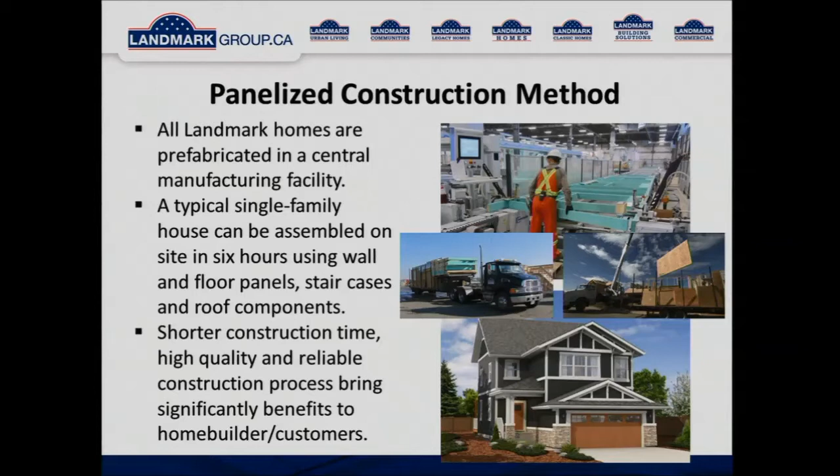Productivity Alberta produced a video from our operations. We use a piece of it here to show, for people who haven't seen it, as an example. If you could run that.

For generations, the principles of how a home is built have remained the same. Landmark Building Solutions is changing all of that and is revolutionizing the industry from the ground up. We will show them that this is the way of the future. We can build any house that you want to your exacting specifications. This is how you can make more money and put it up faster than you can possibly imagine with 100% accuracy every time. And at the same time, revolutionize the industry. The revolution began with Landmark's desire to build a better engineered home, a home that has the highest environmental standards, is affordable, and is ultimately a smart investment for the consumer.

Taking a page from the auto industry, Landmark's revolutionary vision of the construction industry continues in the manufacturing plant. With unparalleled precision and efficiency, the computers in the plant instruct the machines to build many components of the home. For example, if we cut a sheet and it's supposed to be exactly 300 millimeters, it's going to be exactly 300 millimeters, and it's going to fit exactly where it's supposed to fit on the wall. Components are nailed together, and from there they go into the framing line, where they are placed into the wall in just the right sequence. The machine has the capability to make a 40-foot section of wall in minutes.

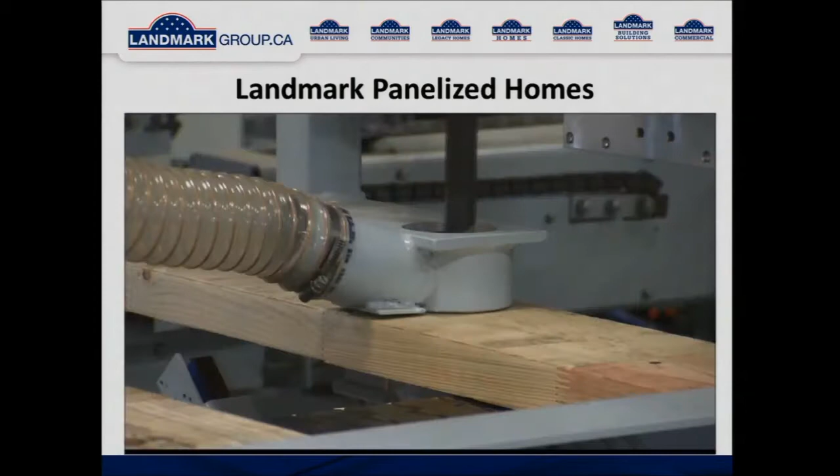All the components come together and are loaded onto a trailer, ready to be delivered to the site. Landmark's innovative approach to home construction becomes very apparent once the components arrive on site and the crew begins the assembly. They can have an average-sized home erected in 4 to 6 hours and ready for lockup. The speed and accuracy of this revolutionary method of construction has a number of benefits for the homeowner.

Since the home components were built indoors and the home erected in less than a day, the wood has never been exposed to the weather. The precision in the plant continues to the site, with every element fitting easily into place. And with this method of construction, the homeowner will save money and have the comfort of knowing they have an energy-efficient home.

We talked about making money, not because I'm a greedy guy, but the best way to entice other people to join this system, of course, is to show them that there is money in it, and we all know that any time you save time and you save the extra waste that we have in our processes, that translates into money. And that's what's going to compel all the other builders to follow suit.

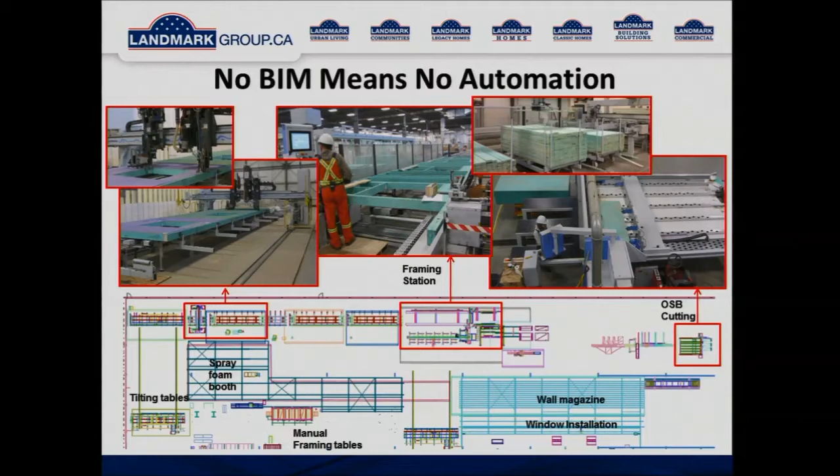So that's the wall line here that we see. These are just pictures, but it must be very clear to you now that when you see the machinery, if there was no BIM or 3D modeling, they couldn't be manufacturing, because the machines need data, and without data, of course, they don't know what to do. So BIM is the most important part of the processes.

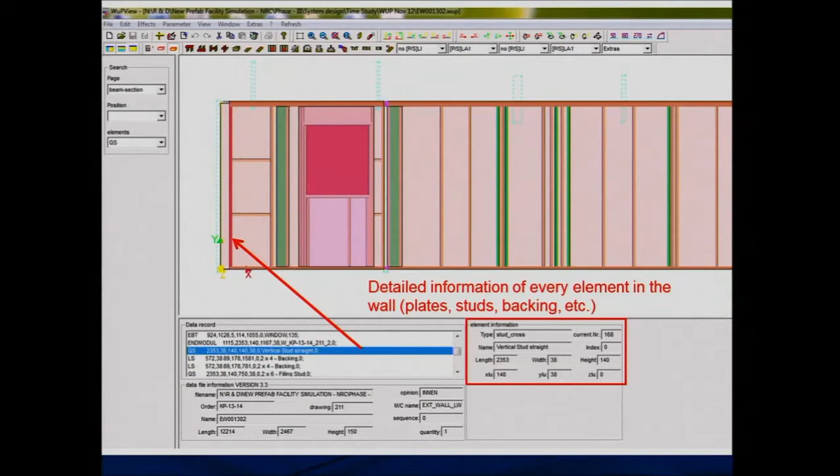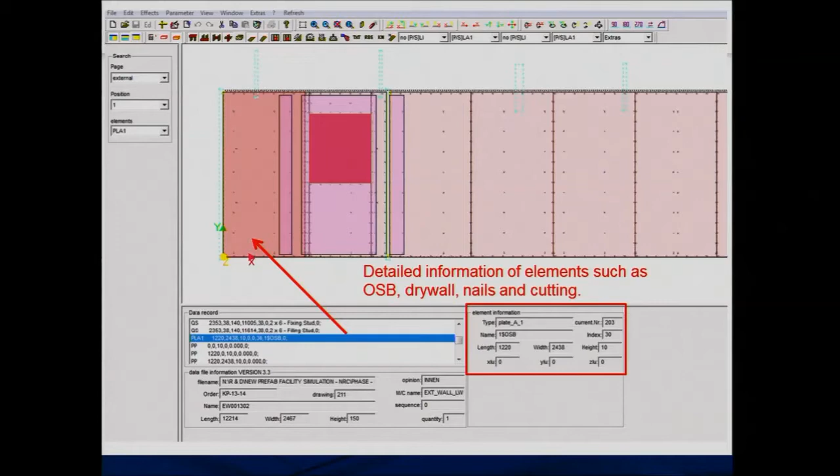So the wall is designed in 3D. It has the details for every element in the wall, like the plates, studs, backings, insulation, whatnot. Then for the skin, you see the OSB or the plywood, whichever is, again, designed. The dimensions, the nail patterns are established. So the accuracy is actually right down to the nail pattern. We know how many nails, other than the waste, of course, go in each house, how many staples go in each house.

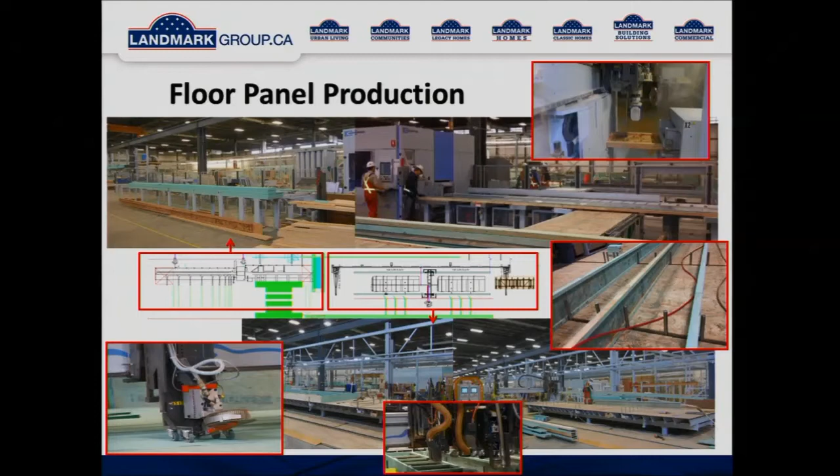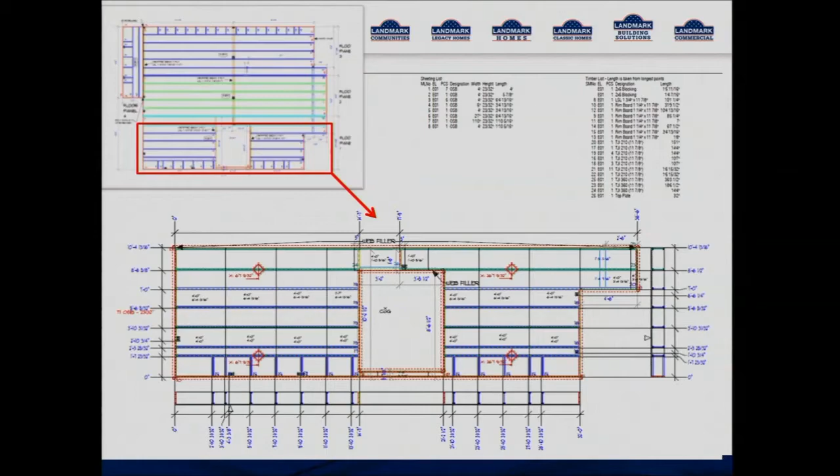So here's a sample of a floor. This floor has to be split into sections that are less than 12 feet wide because of our transportation laws. We cannot transport anything wider than 12 feet unless we get a license and pilot trucks, and that becomes kind of onerous. Also, the bridge, the machines, the robots, it's difficult to make them too wide. The widest one is about 14, 15 feet wide, but ours handles up to 12 feet of wall. So that's a sample of one section here.

This floor is engineered ahead of time before it goes into 3D modeling, and then it goes on to the bridge, after components are cut. That one was the layout, the engineering drawing, but this is now the model created by the software. We use, by the way, a software called SEMA. It's a German software. It was produced originally for manufacturing, and they have been continuously improving it.

So you notice that we're talking about, I would call, two types of BIM. One is macro BIM, one is micro BIM, and here we're talking about the micro, the very small scale. So we go right down to nail patterns, for example, and the number of nails. Here you can see that all the detailed information is on this drawing. You can grab this drawing, rotate it upside down, inside out. You can zoom on any corner. We see, for example, how it's nailed and connected together.

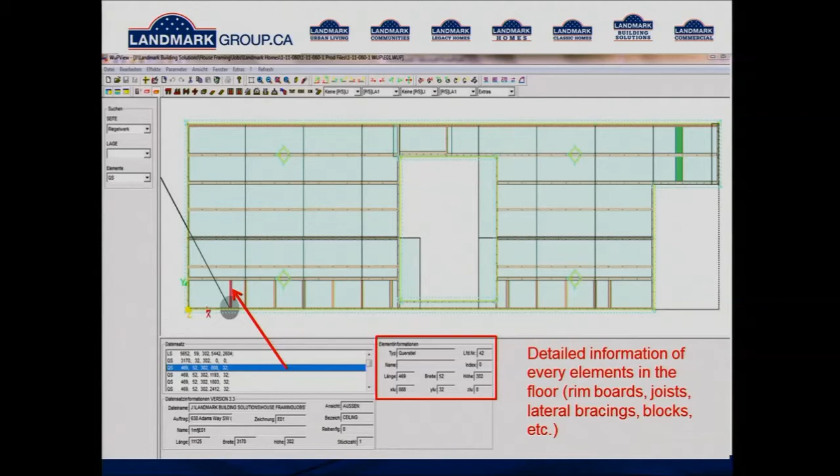The next one would be the sheeting pattern. Again, all the information about sheeting and also the nail pattern of the floor.

So you break down the BIM in our factory in several sections. Number one is that before we could have a 3D model, of course, we have to have an architectural drawing, which I keep pressing the wrong button. Here is the architectural drawing. Of course, we have to have that.

From there, we have to create structural design for the floors. Ultimately, when we do the roof panels, also we have to do the same thing. Then we have to feed the software with the knowledge base information so the software knows what to do. For example, how do you connect the two exterior walls, 2x6 walls, at the corner? Or how do you attach a 2x4 interior wall to a 2x6 exterior wall? Or the codes, for example, that we cannot have any two studs separated more than 24 inches.

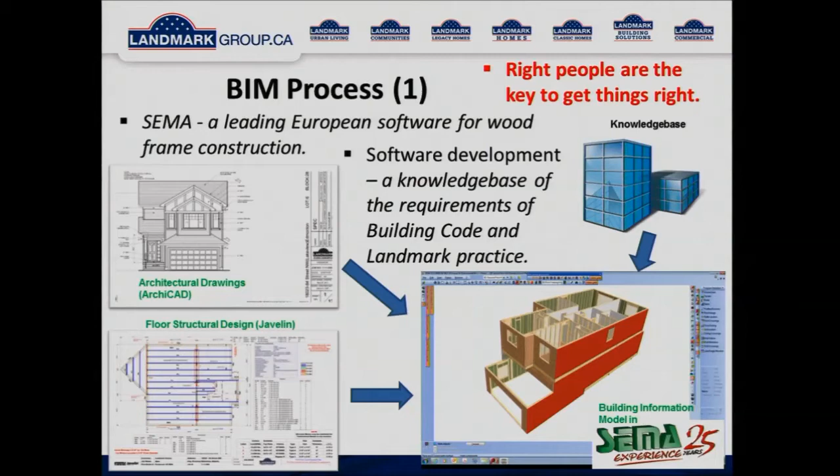So when you feed information together, then the software can actually decide how to design the wall and build the wall, or floor for that matter. So after that, the next process, of course, is that we create from the 3D model that's in the center here. No, I keep doing that. Sorry. Yeah, so we created the 3D model, and from here then we get, of course, the cut list, which will be fed into the machines.

By the way, what we do is that we feed the machines with 3 homes at a time. And the advantage of that, of course, is that when materials are cut, for example, on the panel saw we use for the sheeting, if there is an odd size piece of OSB left, let's say 36 or 34 inches or whatever, the software looks through all 3 houses and finds the closest match to it so that there is the least amount of waste created.

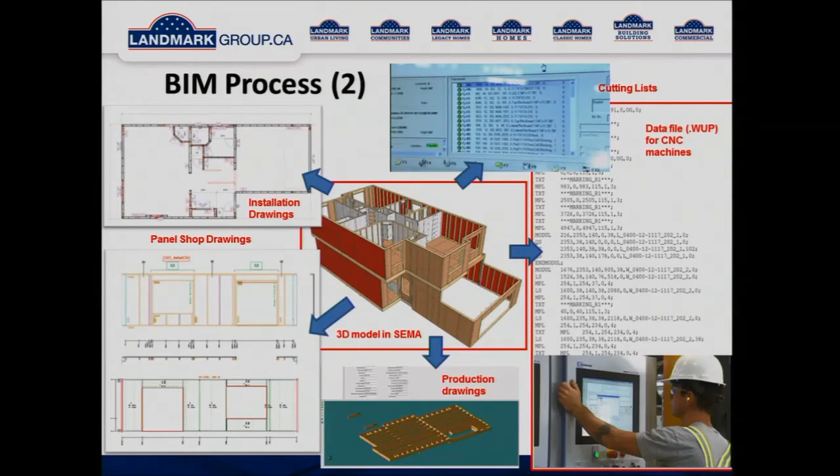So when you look at the panel saw, for example, with OSB, there is a reasonably small size bin, and for the whole day, sometimes we empty it only once, or sometimes we don't empty it until the next day. Very little waste generated. Of course, that information then is translated into a data file or a WUP file, the files that drive the CNC machines.

So the information created then is entered in all the machines, the saws. We have two saws. That's the component saw. They cut 2x4, 2x6 joists or any kind of dimension lumber. And we have a panel saw that cuts OSB sheets. These are pre-cut already for the walls and for the floors. So the data is fed into all of them.

Now, each machine, when they cut, for example, for house 1 and the next cut is from house 3, then they print a sticker, a label that gives the information for that particular element, whether it's wall or floor, and which house it is. So we have 3 carts that they pick these cut elements and put them in the right sequence. So that when they manufacture, they take that particular cart to the right machine.

Then again, from the BIM, the 3D model, we can then produce an installation drawing so that when they go to site, they can assemble the house. The same thing here with the floor, of course.

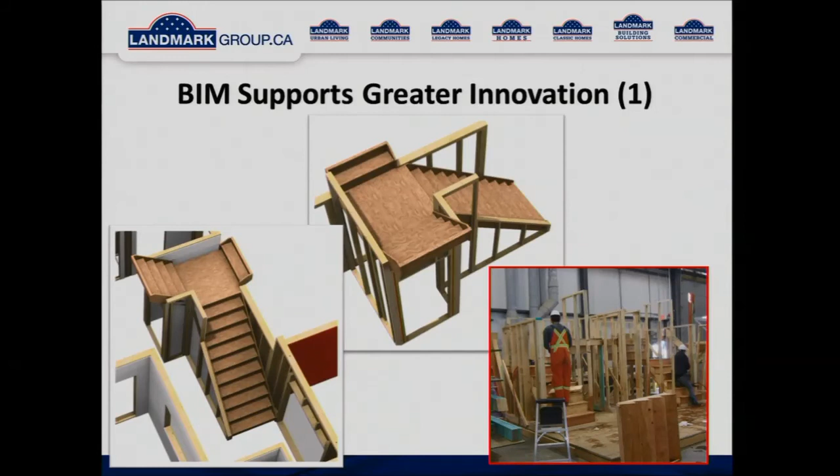So the next part of the BIM, of course, is the mechanical and electrical. And that's something that we started recently because it's a progression in our case. There's so many things involved. So now we have started actually designing our heating and plumbing. And we have about half of our plans now designed, and we invite the plumbers and the heating contractors to come and give their opinion.

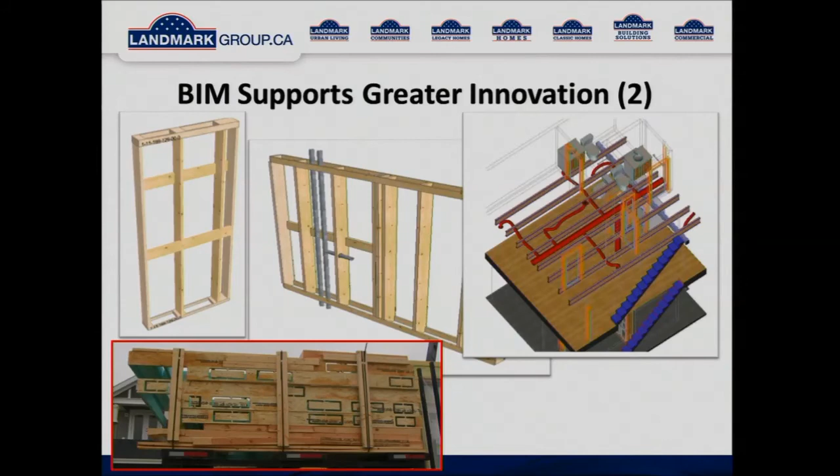There's a tremendous amount of waste in heating and plumbing. You can imagine that the contractor goes to site and they have to go to three floors, basement, main, and second floor, and constantly go up and down, drive a nail to see where it comes out so they can locate their pipes.

Here we have the drawings and 3D drawings, and we can separate the heating and plumbing altogether so that they don't share the same joist space. We keep working at it until we come up with the shortest length of pipe and the least number of joints in Y or T sections, for example, and that's a lot of saving.

Then we produce a 3D drawing that visually helps the contractors on site to see where they don't have to look. All the holes are pre-cut, so the contractor can just install it very quickly. In the future, we can install most of these in the plant, in the floor space or wall space, and then connect them together on site. But we are not there yet.

Prior to this, we just cut knockdown holes, so if they needed a pipe here, they would knock this part in. But that's very inefficient. That's why we now switch to the design. When we design, we have no problem. We will have a hole exactly where it's required, the exact size that's required.

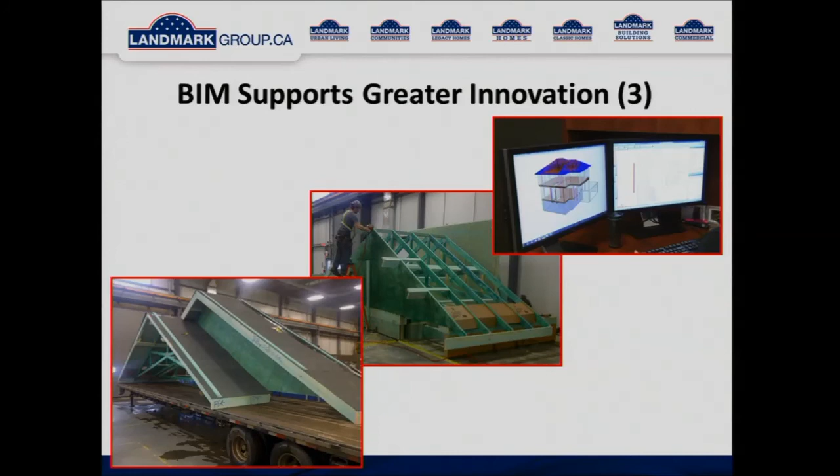That's why we started manufacturing these in sections in the factory. Under half of the houses are now built this way. The advantage also is that we can put the decorative trims on the gable ends, which is dangerous site work, because the siding people usually work on ladders and there have been a lot of falls. So this has been very successful, and we're going to switch all our roofs to this. We're just creating some space now to do that.

Part 4 of BIM is again to add value: plumbing, heating, electrical, drywall, exterior cladding. Drywall itself is not a very difficult thing to install in the plant. In fact, it's very easy, just like installing sheeting. But we have never had a situation in North America where the wires were not exposed for inspection. Electrical inspectors like to see the wires and pass them before they're covered.

So now we have this dilemma. The City of Edmonton has been tremendous, championing our cause and really helping us. But the bylaws and rules are rules. So we have to find a method to close the walls and satisfy the electrical inspection, or wait until the codes recognize this panelized manufacturing and allow us to do that. So we have been working with conduits,

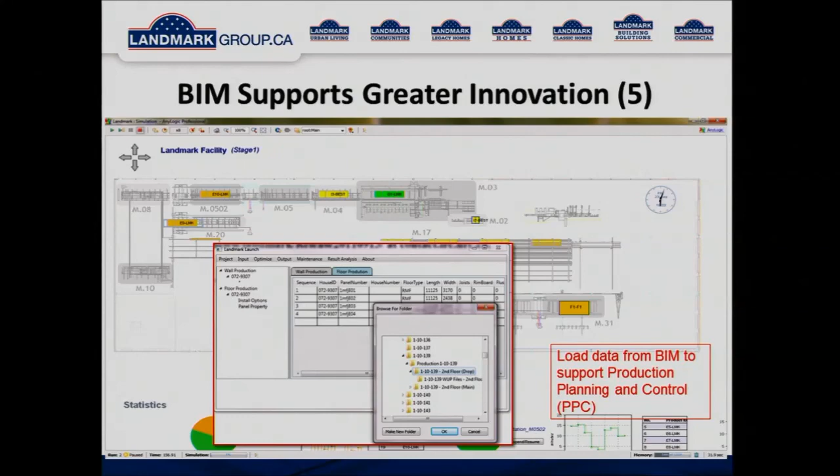So that's pretty well it. BIM is what allows us to manufacture. Without it, it would be impossible. The benefits are quality, productivity, waste reduction, resource planning and cost control. Cost control is the biggest thing. Once we achieve siding and drywall, the cost will come down substantially lower than stick framing.